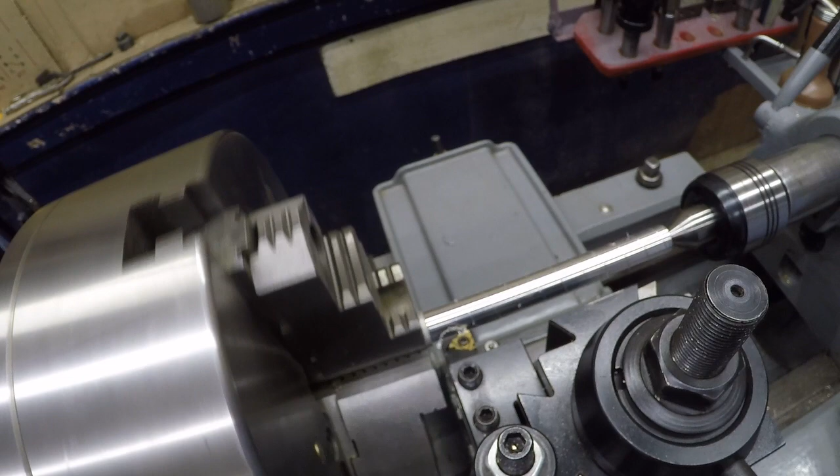Okay, now I'm going to back this off to 0. Bring it down. Can we all see that mark?

We are back at 0, and I'm going to engage this on the letter A. Here goes 1. Okay, the letter A is following, so I'm going to start it on the number 2.

I'm going to start it on letter B. Letter D. I tried B. Let's do 3. Okay.

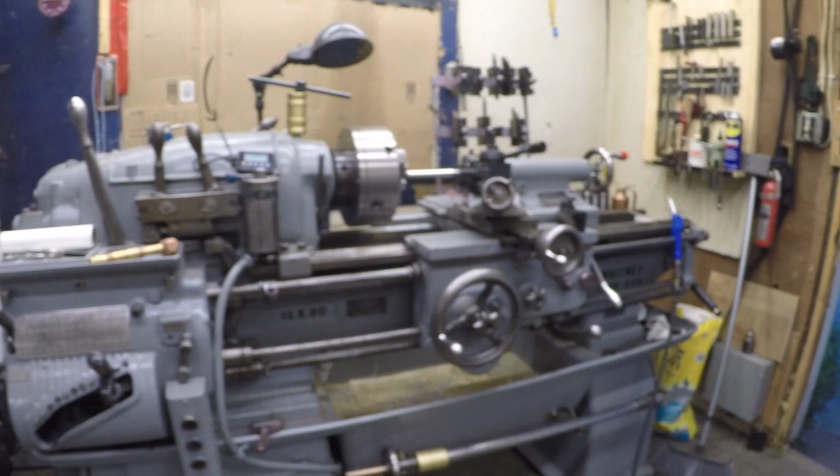It's important to learn something every day. Pratt & Whitney, 12 by 30. It's a thing of beauty. Okay, I'm going to end it right there.

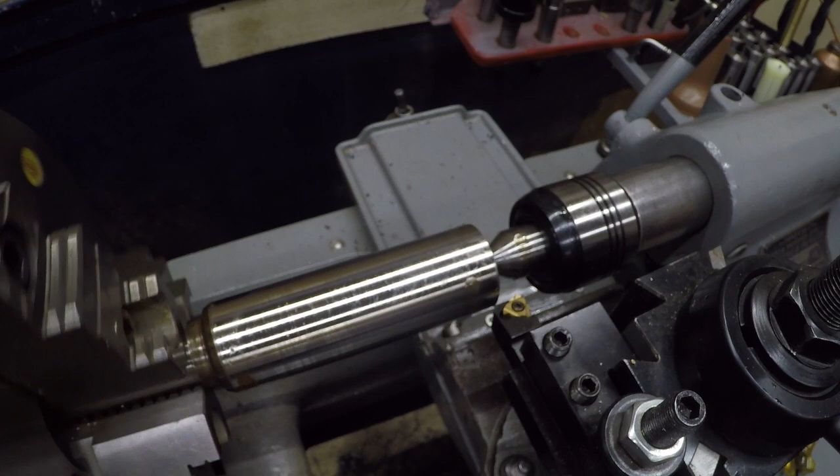I'm going to come down here and get some power. So we got quite a ways to go to work around the 1. So I'll just talk to you. Like I said, I'm not convinced I'm going to be able to even put a mark on this.

I hope you can see that. I'm betting you can. And I'm hoping I can take that all the way to the end. Not going to chance it.

Okay, back to 0. I'm leaving it at 10, and I'm going to start on A this time. I just passed it, so we're going to wait for A to come around. Okay, we're about there. And here comes A. I hope you're seeing that.

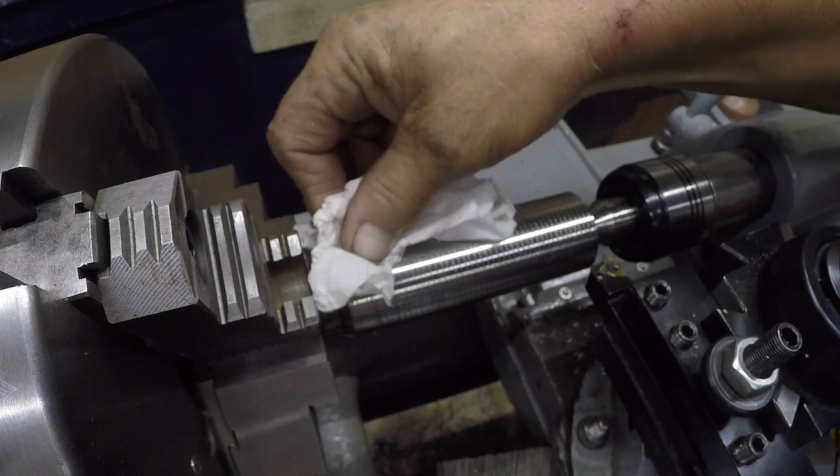Back to 0. I think we might have something here. Tell you what I'm going to do, I'm going to blue this thing up. Let me bring you back. Okay, I hope I achieved something here.

So we're going to do our second round here. We're going to start with 1, move on to A. Second thread will be 1A, 2B. Now I'm going to put in another 10 thousandths, 15 thousandths. I got you in a better position, at least out of my way, so.

Okay, we gotta work our way back around to 1. Here comes 1. I'm going to add another 10 thousandths. And we just passed 1.

Okay, this is going to be the money shot. Let me mute that man there.

Yeah, I resorted to spray painting my part black. I have some Dykem, but I have no idea where it's at. I know it's in a Ziploc baggie, but beyond that, I have no idea. I found a place in my drawer that's got a lot of stuff stained blue, and you'd think that would be it, but no.

Okay, just for general information and maybe some feedback, I've already fed in 97 thousandths just to make that little groove. So that's taken, it took 90 thousandths to get all the spring out of this machine. It didn't run out the way I see it, but if you know about it, you can compensate for it. I'm going to go turn on the phase converter.

Now, one observation I've made since I've started, and it's too late to do anything about it, is my tool is off center in the tool post, in the tool holder. And if I straighten it out, it's going to throw all my threads off. So I just have to go with it.

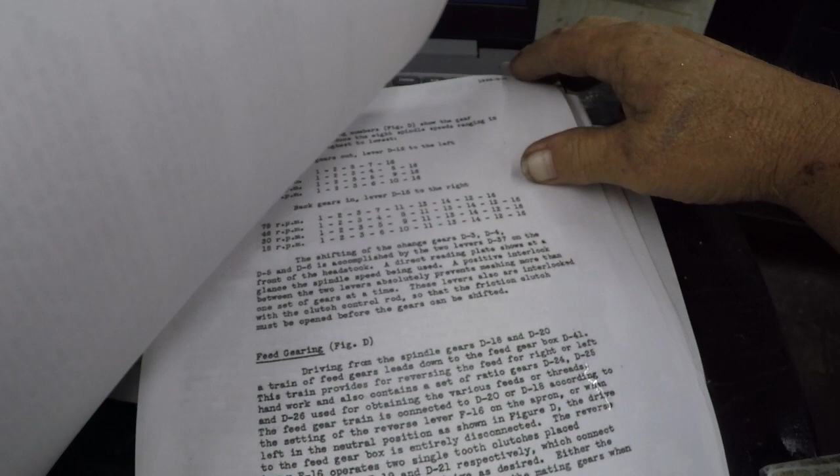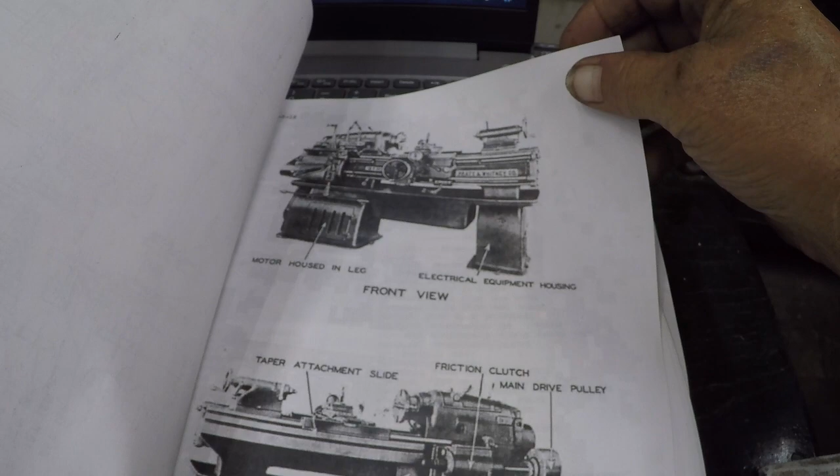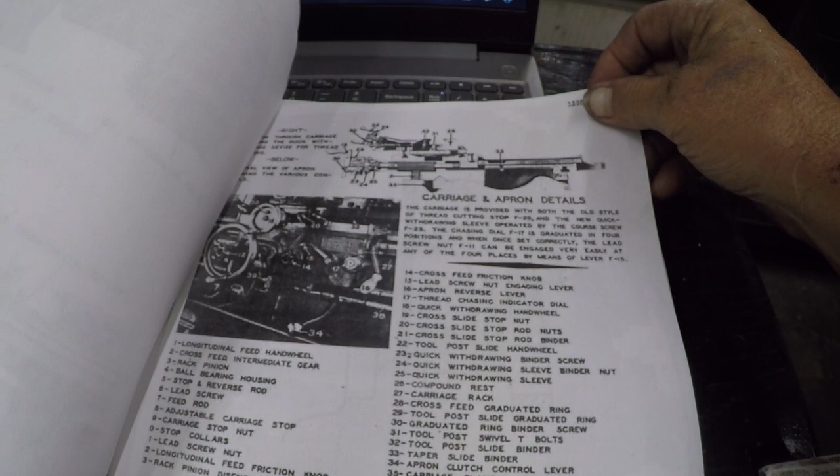This one is pretty much specific to my machine, whereas some of the other literature that I have doesn't necessarily correlate with it. Yeah, this is all Model B. So there's some drawings, and some exploded views, and some pictures, and some legends with part identification.

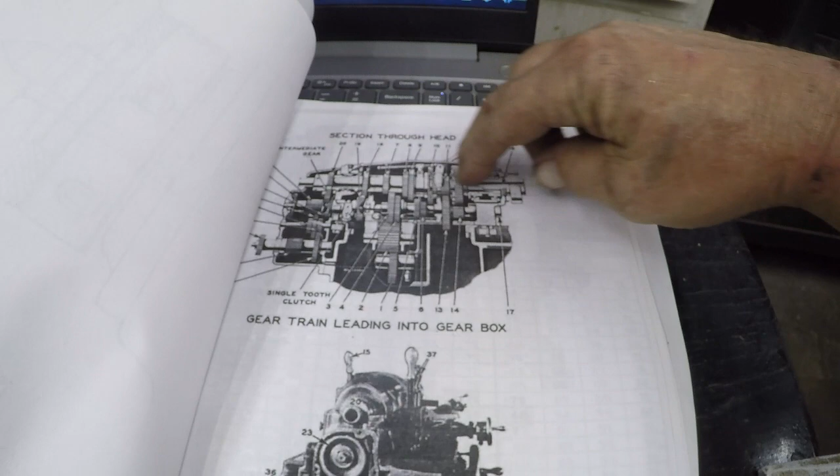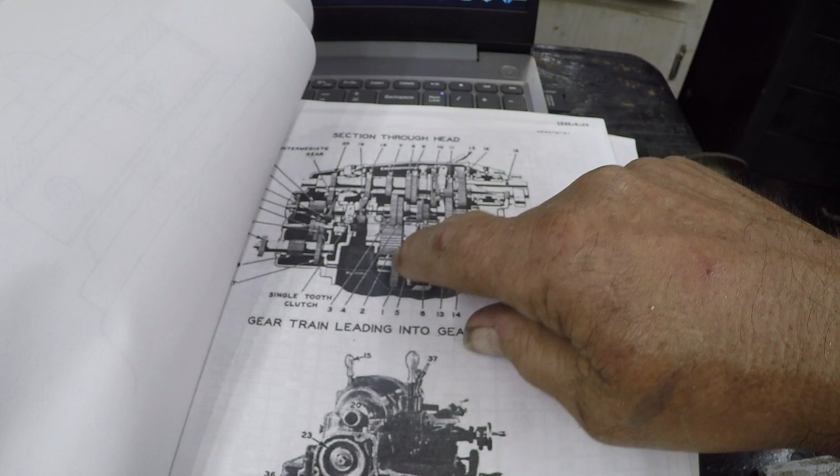There's some camlock spindle nose information. There's some headstock gear train. So here's the gear train. Here's the spindle. When you're operating in back gear, as this lever is indicating, you're operating this top spindle primarily. When you're using regular gears, you're primarily spinning this center gear train, which is pushing the spindle. And the train below that is kind of focused on the feeds, I think, because I can reach up in the bottom of that and correct my feeding issues pretty readily. So here we go.

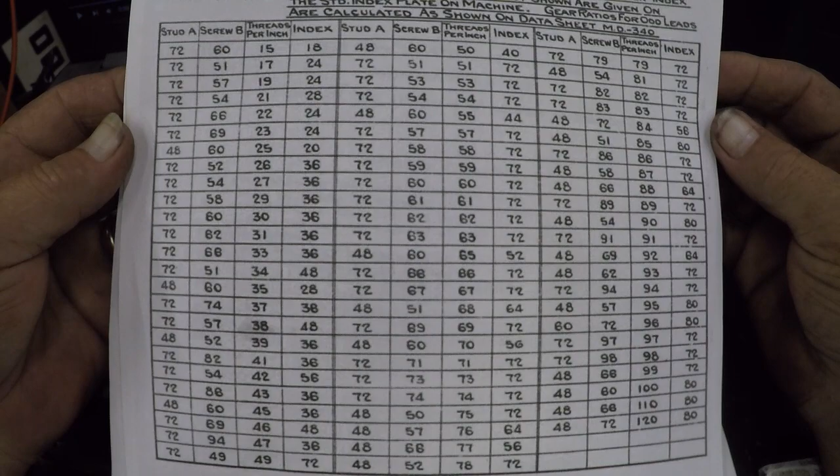Chart for special threads. Now, let me light this up so I can see what you're seeing. Okay, I'm going to show half of this page and hold it there. And then I'm going to show the bottom half. Okay.

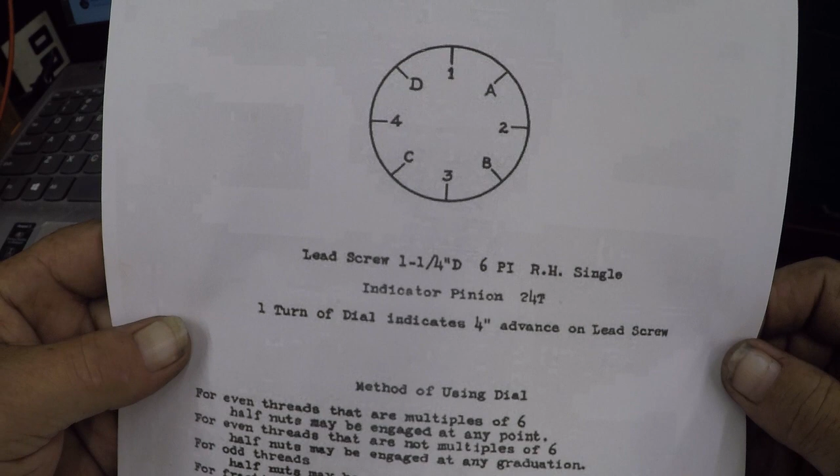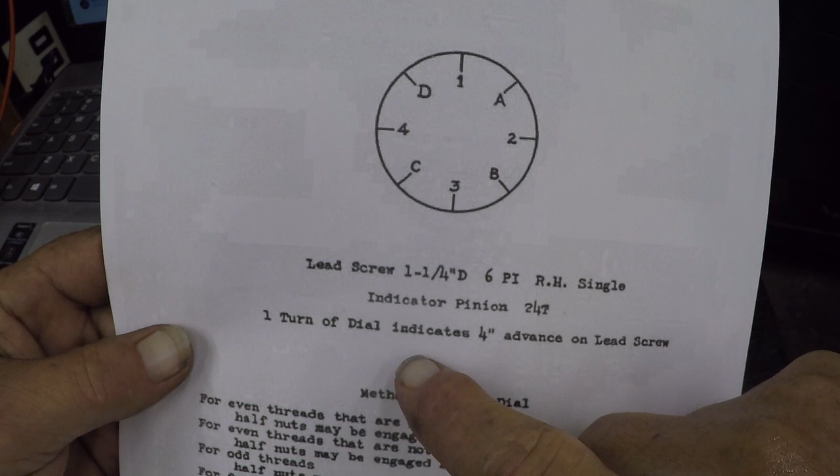Lead screw: 1 1/4 diameter, 6 PI, RH single. Indicator pinion 24T. One turn of the dial indicates 4 inches of advance on the lead screw.

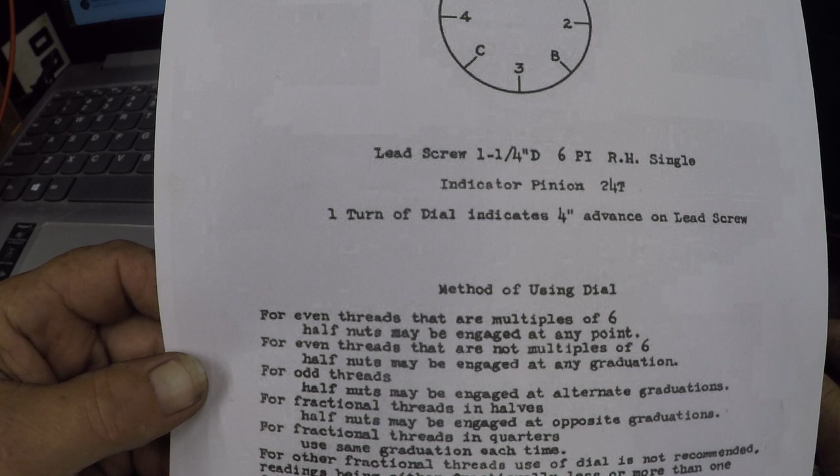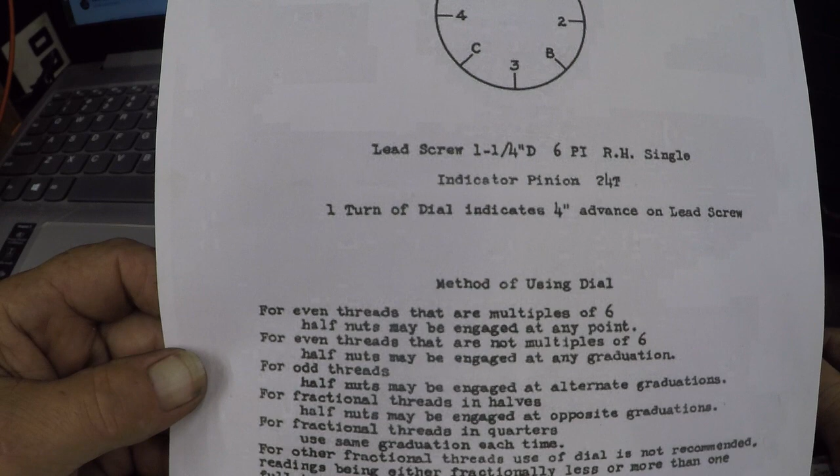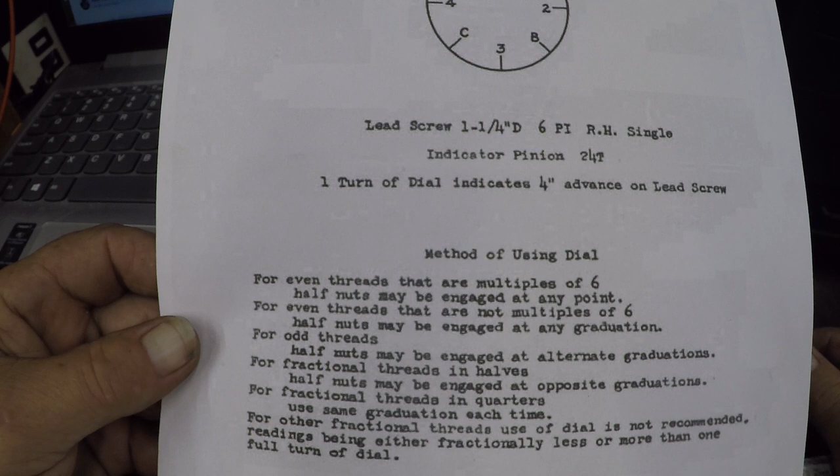Method using the dial: for even threads that are multiples of 6, the half nut may be engaged at any point. For even threads that are not multiples of 6, the half nut may be engaged at any graduation. For odd threads, the half nut may be engaged at alternate graduations. Half nut may be used for fractional threads in halves, engaged at opposite graduations.

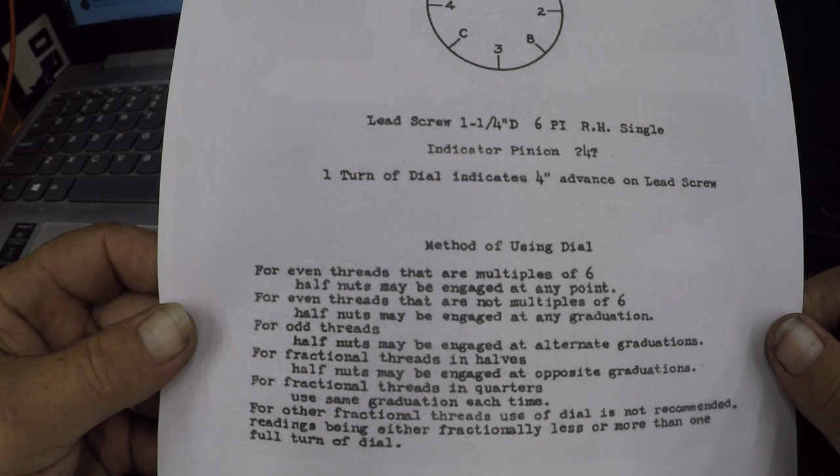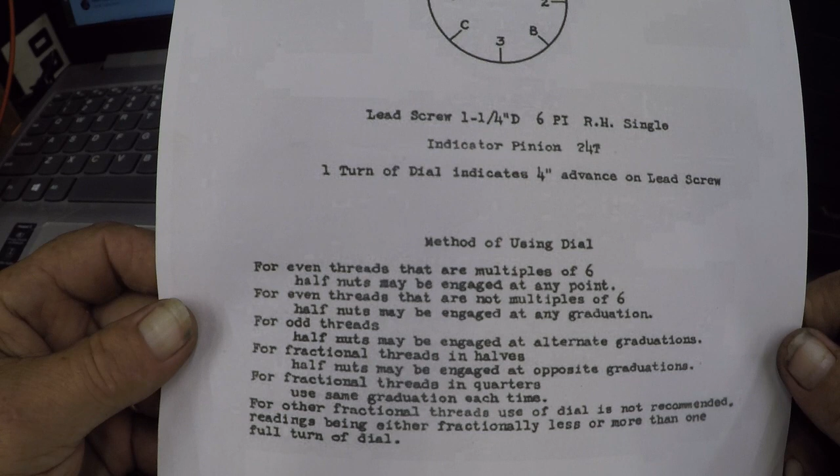Use the same graduation each time. For other fractional threads, use the dial, though it is not recommended, since readings will be either fractionally more or less than one full turn of the dial.

So that's all way over my head. I have no idea what they're talking about, except for that first part.

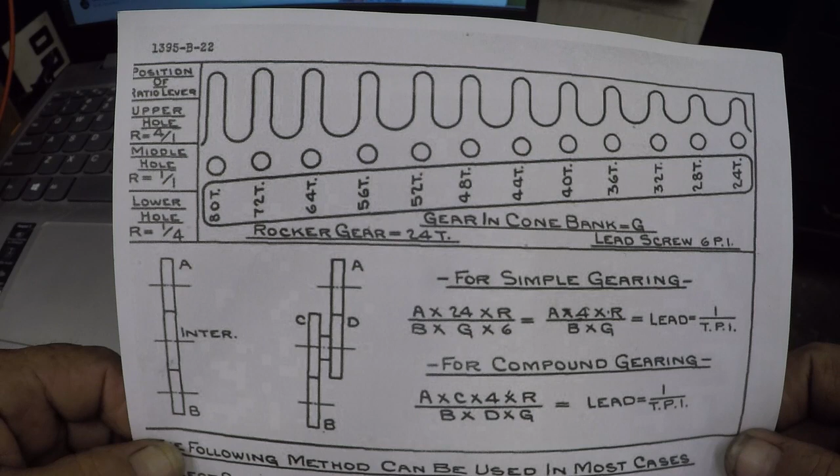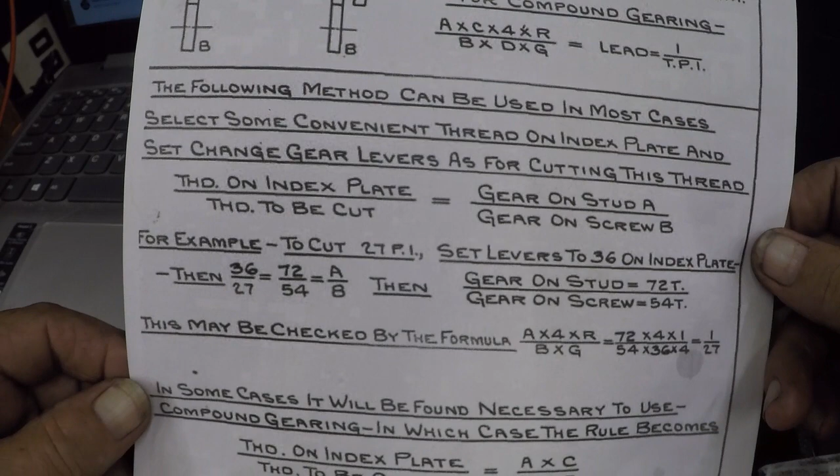Okay, here's another diagram, and I'll hold that there so you could get a screenshot if you wish. And then here, now there's the meat and the potatoes here.

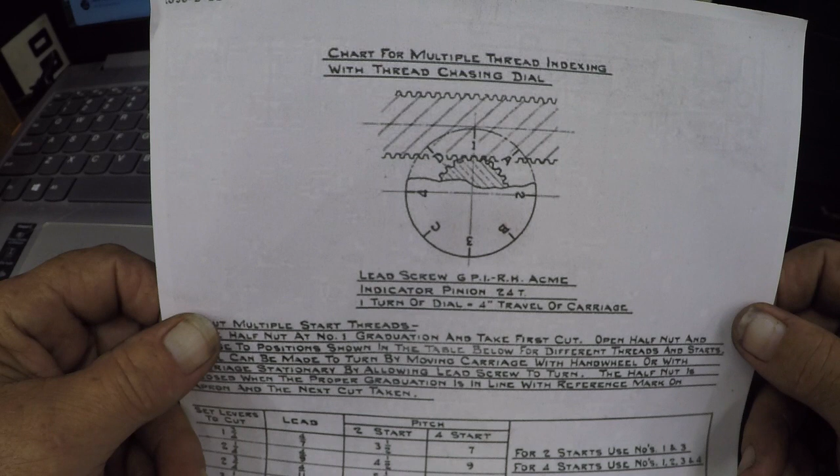Chart for multiple thread indexing with thread chasing dial. Lead screw 6 P.I.-R.H. Acme, indicator pinion 24T. One turn of the dial equals 4 inches of travel of the carriage.

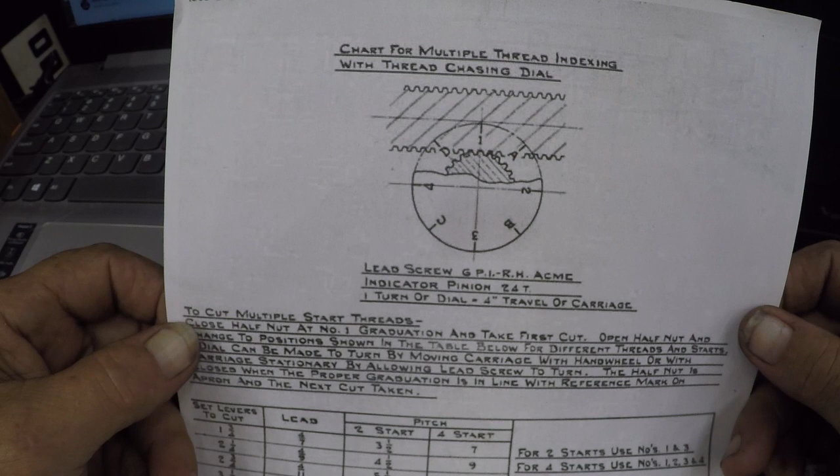To cut multiple start threads: close the half nut at No. 1 graduation and take the first cut, open the half nut, and change to the position shown in the table below. Okay, so here's the table below, and I'll show you what we just did.

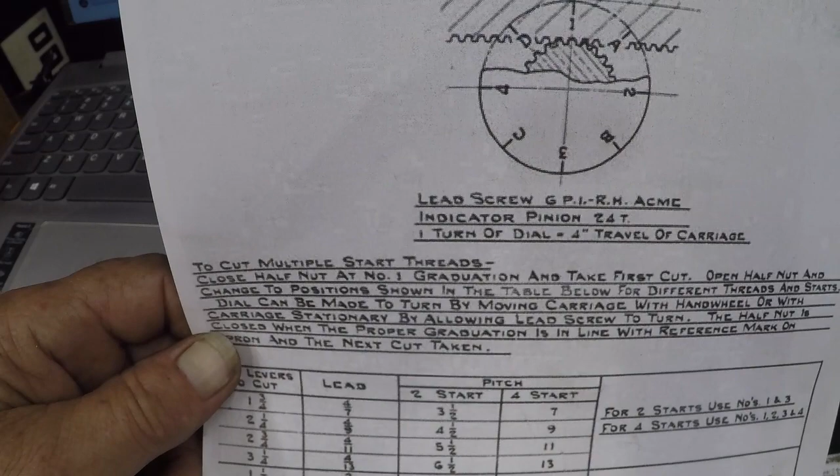So I just did 10 threads per inch. Here's instructions for 2 starts, use 1 and 2. For 4 starts, use 1, 2, 3, and 4.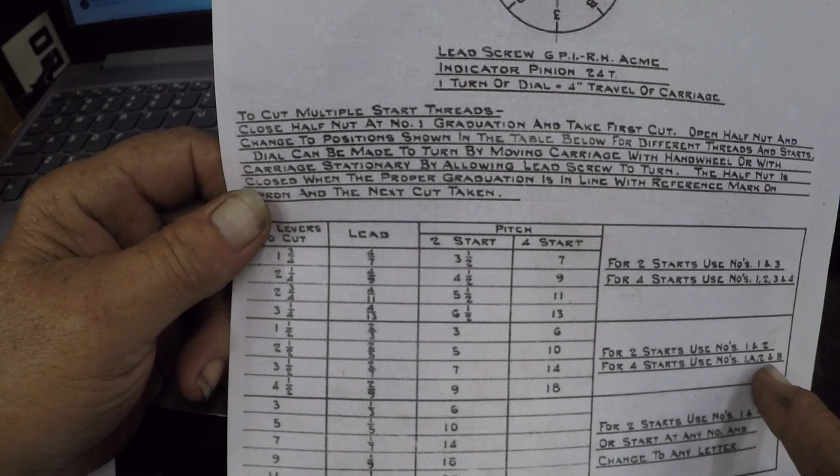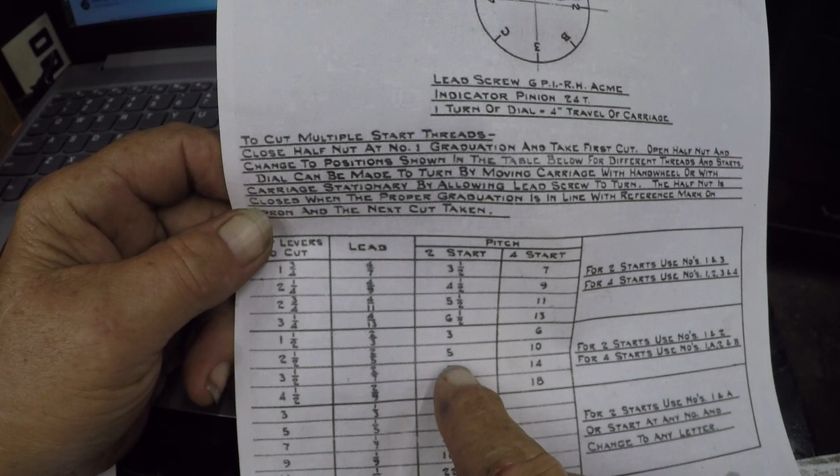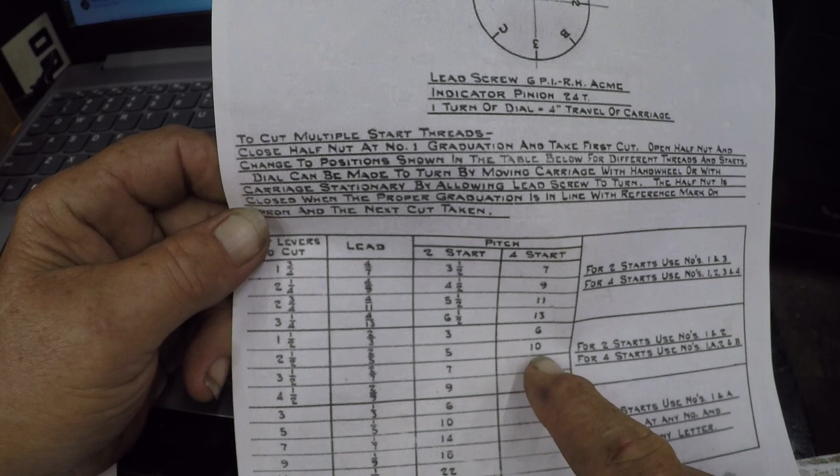So we're setting our machine at 2.5 threads per inch. The lead is 2/5. Two start is 5, four start is 10. So if you do the 2 start threads, you're getting 5 threads per inch; 4 start thread, you're getting 10 threads per inch. Let's go up here to this chart.

Let's go 13 threads per inch, so you want to set it at 3 1/4. The lead is 4/13. Two start, you're getting 6.5 threads per inch. Four start, you're getting 13 threads per inch.

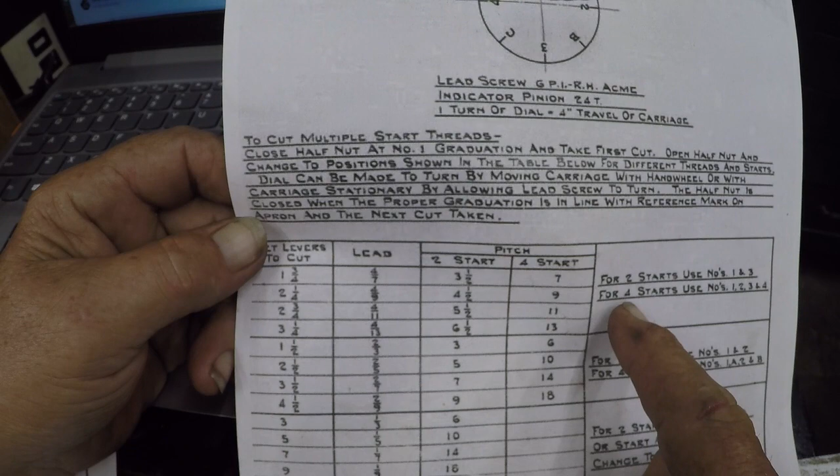And here for 4 start, you're using 1, 2, 3, and 4. For 2 start, you're using 1 and 3. So there's 2 different categories.

Now down here for 2 start, use numbers 1 and A, or start at any number and change to any letter. And that is for 6, 10, 14, 18, 22, and 26 threads per inch. So for 26 threads per inch, you set it at 13.

Now, why didn't it work the first time I did it? Okay. Even threads - 2, 4, 6 for example - cannot be indexed. So I was trying to do 2, 4, 6, 8 - I was trying to do 8 threads per inch in the very beginning of the video, when I had no success.

Okay, I'm getting some kind of file can't be supported message. That's it, I already did this, but I can't play the file.

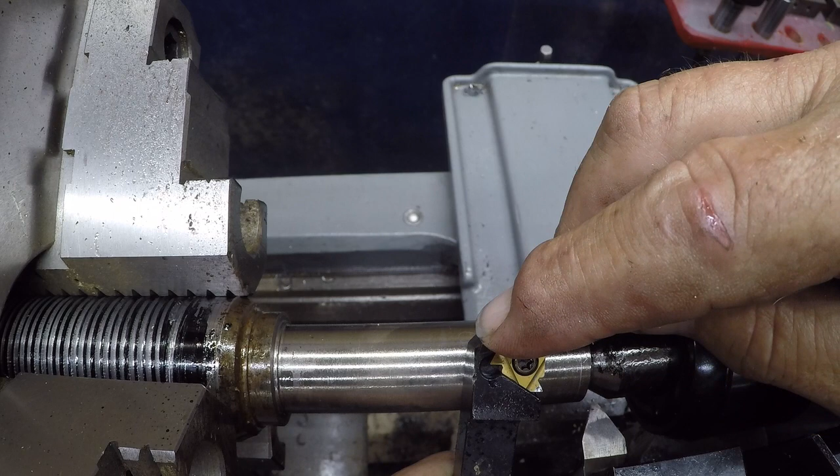You can see down here are the old threads. Because my tool - where is it - despite breaking it, because my tool was cockeyed, I was making contact down here on the tool holder. So these leading threads were getting rubbed flat until it went forward enough to pick up, for the cutter to pick up the point. If that made any sense.

I've obviously switched to high-speed steel here, and I am all set up. We are going to give it a go. We're going to start on 1A, 2, and B. I'm going to dial in 10 thousandths because I'm not sure how this is going to act this time. And here comes one.

Okay, we're going to go a little deeper. Now we're at 30 thousandths, and we're going to start at 1.

Okay, this time we are starting at 2. No, we're going to start at A. Forget that - I could have done 2 and went back to A. And there's A.